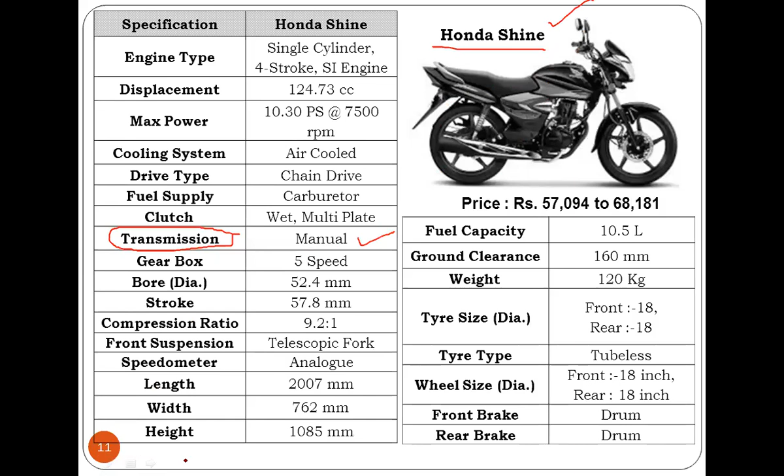So we had discussed about Honda Shine, one of the two-wheelers. Now there are plenty of specifications which we are going to see, or which I have listed in this particular PPT. It was prepared considering the written exam. Written exam mein koi bhi type ka vehicle poocha ja sakta tha, aur uske kuch 5-6 specifications aapko likhne the wahan par. So from that perspective, I had included the various sorts of automobile vehicles and their specifications. So during this particular lecture, jo bhi naya specification hai, that we will discuss.

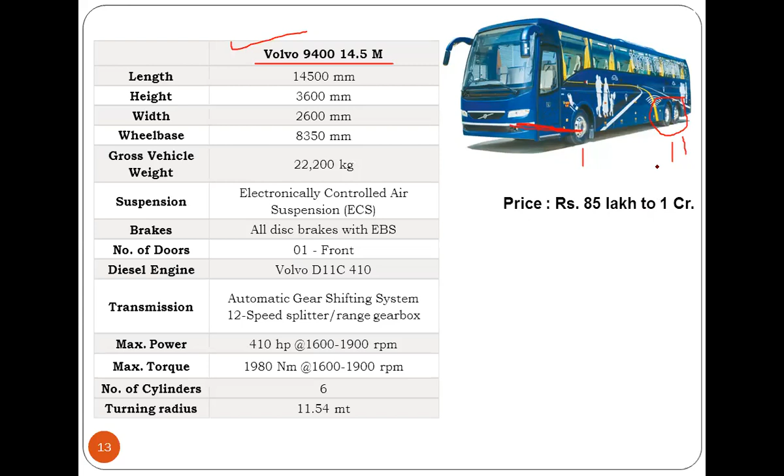But in the Volvo, we have one more axle, isn't it? That is why it is called multi-axle. And usually multi-axle gives you more comfort compared with normal axles. Why? Because as we add the axle, we are going to include the suspension system over there - suspension system also gets added with the axle. That is the reason why we have more comfort in case of a multi-axle system.

Now multi-axles also exist in trucks, but there comfort is not the priority - there, bearing the load is a higher priority. Don't get confused between the multi-axle of a transport vehicle like a bus and the multi-axle system in trucks.

Otherwise all other specifications we had discussed. Here, suspension is electronically controlled air - electronically controlled air suspension, ECS is there. Many times you might have seen 'Airbus' written on the rear wheel, isn't it?

Have you seen 'Airbus' written there? So what do you understand by that Airbus? It means the suspension is pneumatic suspension. Okay, so that is what it means.

Then braking system - for braking system we have hydraulic brakes, we have pneumatic brakes. So this is nothing but pneumatic brakes, all disc brakes with EBS. EBS is electronic braking system. Then number of doors is single door.

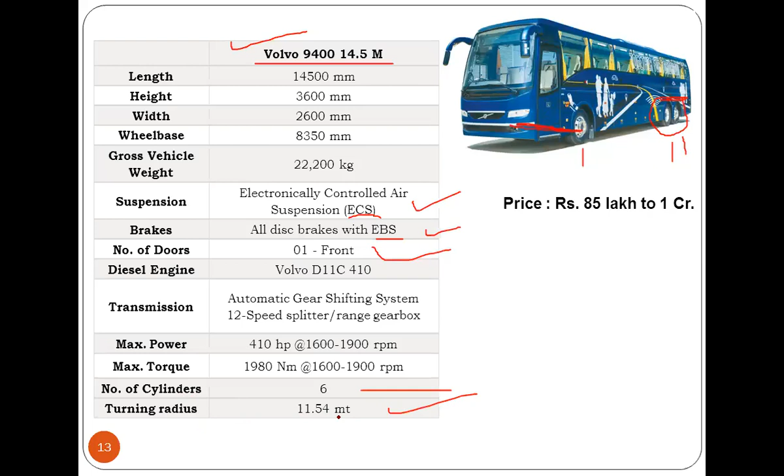All other things are the same. Number of cylinders are 6. And one more term is added - turning radius. So turning radius is 11 meters. That is what was about the Volvo.

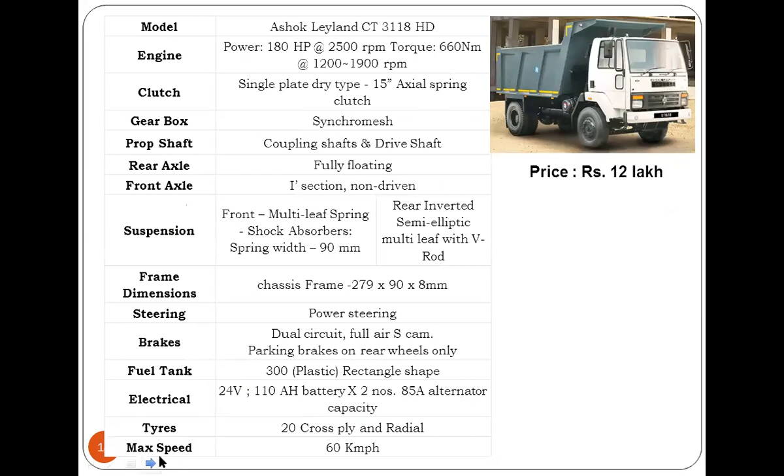Then next comes the Ashok Leyland. All the specifications are the same, nothing new in it. So you can go through it from the Google Classroom.

Next, very famous, very well-known vehicle, the three-wheeler, which is nothing but the rickshaw. Now it is the only vehicle which is available for all the fuels - petrol, LPG, CNG, and diesel. And if we add electric to this slash, that would also be correct. So it is the only vehicle which is available for all the fuels. Am I correct or not? Yes, sir.

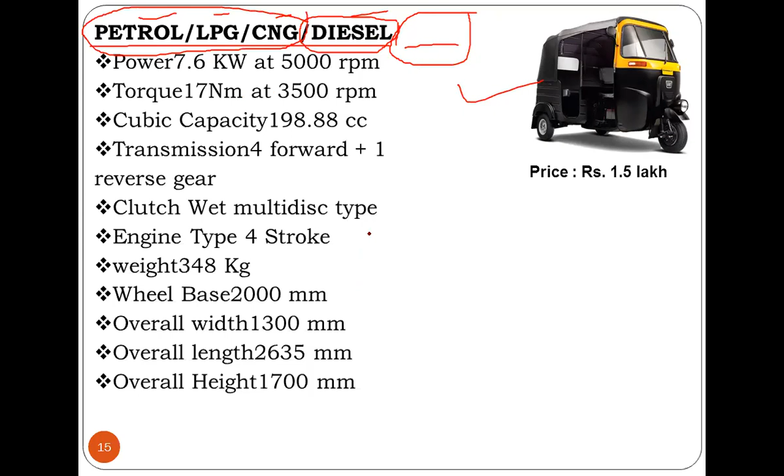So what change will be there? Where will the change be visible to you - which vehicle or which fuel change according to the construction? Fuel change is there, but if we are discussing this particular fuel, then there is a single engine which can take care of these fuels. If we are talking about this fuel, the engine will have to be different. If we are talking about electric vehicle, then there is no engine, isn't it? So category wise, these three types we can have for the three wheelers. All other specifications are common ones that we had already discussed.

Now the very important topic, or the favorite topic of an examiner, is nothing but the engine specifications. So whatever specifications we had discussed up till now, from that we should be able to sort out the vehicle specification and engine specification separately.

So here we had separated the engine specifications from all the specifications. For Tata Tiago, we had jotted down the different specifications. What is the first specification? Engine type, whether it is a petrol engine or a diesel engine - that is engine specification number one. Then number two, emission norms - as per the emission norms, where does it stand? Bharat stage BS4, so it stands in BS4. Then what is the capacity of an engine - meaning how many cylinders are there, and then what is the CC of that particular vehicle? So this is the second parameter.

Then maximum power, and maximum torque - what is the availability of that particular vehicle or engine? That is the third and fourth specification. And then lastly, whether it is an automated system or a manual system - that can be known from the transmission. So these particular specifications belong to engine specifications.

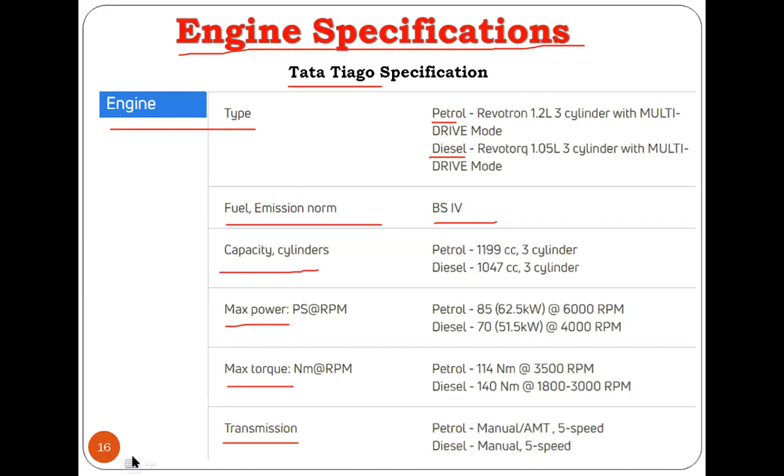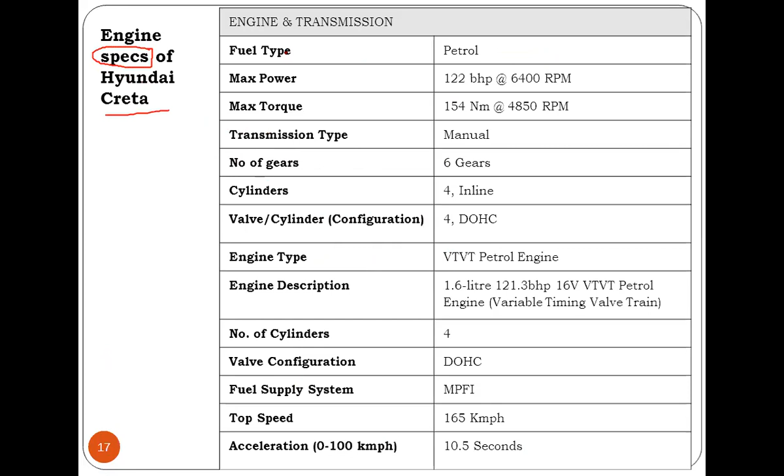We had considered another vehicle, that is Hyundai. So these are nothing but Hyundai's engine specifications. And somewhere, a short form of specification is used - that is nothing but specs. So this is a short form of specification, specs. So these are nothing but the specs of a Hyundai Creta engine, as well as transmission. So you can go through it.